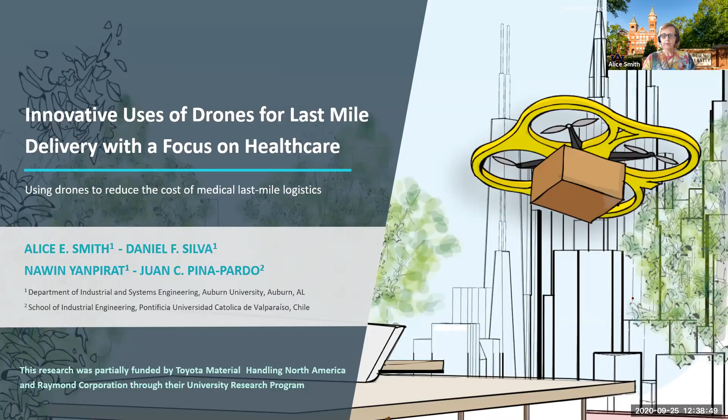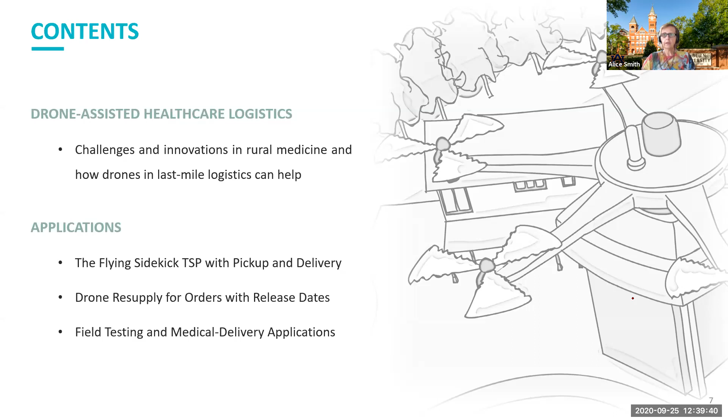Okay, so what we're going to talk about today are some of the challenges in rural medicine and how drones can be applied to help those challenges. I'm going to talk about two different models that we've developed. One is called the flying sidekick problem with pickup and delivery. The other is drone resupply. So those are the two main topics. The first one is by the student Nawin, that's his PhD work. The second is by the student Juan Carlos, who is actually a student at Católica in Valparaíso, Chile, and that is his PhD dissertation. I'm also going to show you some field trials, both virtual and physical, that are part of the project.

So we started this work about 18 months ago, and we're interested in looking at how drones could be used in last mile deliveries, but we were especially interested in addressing some of the problems in our region. Alabama is a relatively rural state that's kind of economically challenged in many areas, and rural medicine is definitely underserved in Alabama and many, many other places in the US and in other countries. And so we felt like drones could have a role to improve this situation. And our idea is delivery of medicines and supplies to the homes of patients and pickups of empties and medical test specimens. This work was already underway for a year or so when the pandemic hit us.

And then we realized that with the pandemic, there's even more motivation for this work because with the need to do home testing, testing for the virus and reporting it and samples and so on, this could be a way, in any type of pandemic, our current one or future ones, I'm sure there'll be some sometime in the future, to deliver tests and pick up specimens or empties as needed.

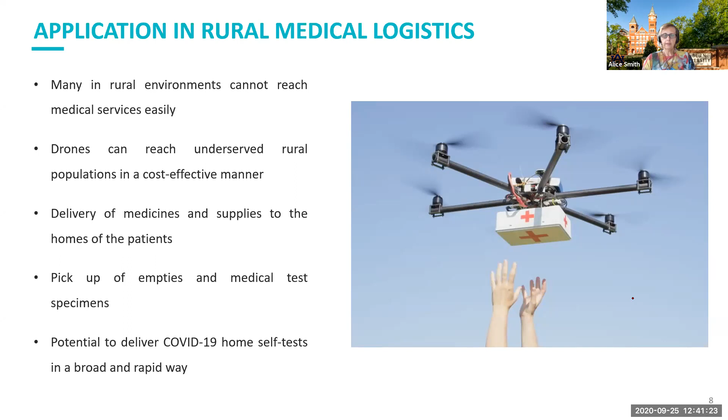So the first thing I'm going to talk about is using drones for both pickup and delivery at customer locations. So one of the things that we were well aware of is that delivery gets pretty much all the attention in the drone literature, but there's also pickups. There's pickups for returns. For example, Amazon recently published that 10 to 40% of their items are returned depending on the category of item. Returns are expensive, but customers are very preferential about choosing retailers with liberal and easy return policies. I know when I shop online, which I'm doing a lot of nowadays, I really want things with, quote, free returns and something where I can just put a label on it and send it back easily.

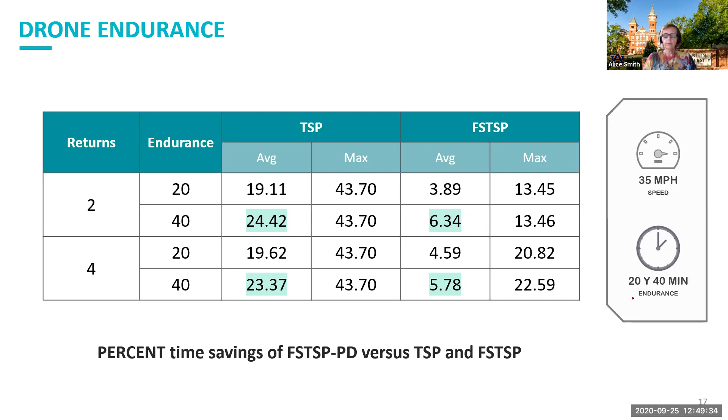If we look at the endurances and numbers of returns, we can see, not surprisingly, if the drone has a longer endurance, in this case of 40 minutes as opposed to 20, we get even improved savings over the more limited drone. The drone speed is also somewhat impactful. So if we move to a quicker drone, again, it improves the time savings over both models.

However, 10 customers is not so many, and our exact approach was not computationally feasible for much bigger than 10 customers. So we developed a heuristic. It's basically an improvement heuristic where we're dividing up, first doing a truck path, and then we create drone paths, and we iterate. We have an overall optimality gap of less than 2% for this heuristic, and it's nearly 2 orders of magnitude faster than the exact model, and it's quite robust to both problem instance and random number seed.

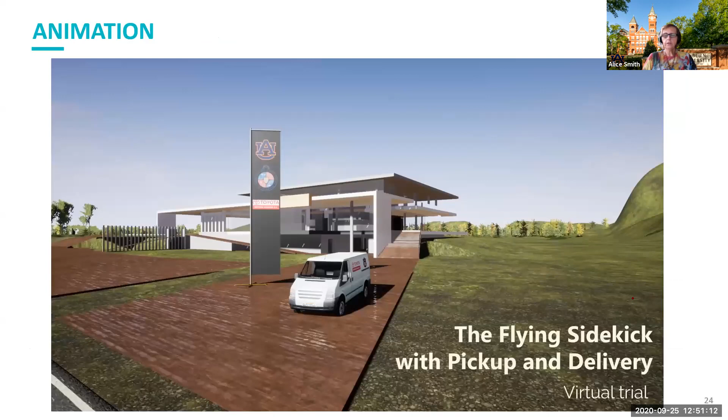So what I'm going to show you now is a virtual field trial of this, because I think it will give you a better idea of how it works. So this is our animation that shows you how this would work in person.

Ugh. Okay, and this worked yesterday when I did this. Let's see. Let me try one thing. Okay. Now, this is not going to work for some reason. All right, let me get out of the slideshow and show it to you this way.

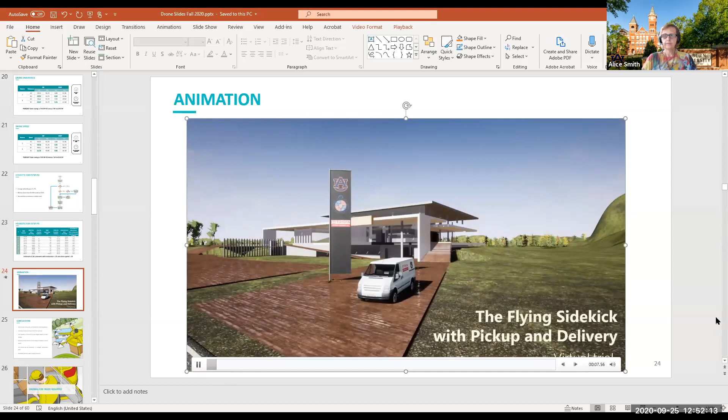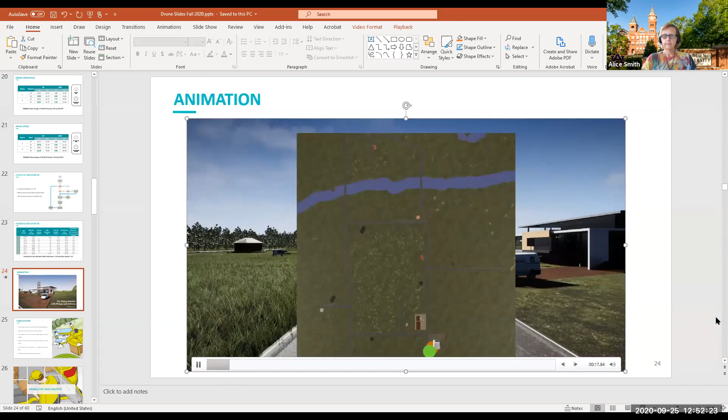Sorry for that. This video shows a virtual trial of an instance of the flying sidekick with pickup and delivery model. In the model, a drone and a truck are used for pickup and delivery of parcels. In this instance, there are 10 different locations. This is how they are distributed in the virtual environment. The location of the vehicles will be indicated by 2 dots. The green dot is the truck and the orange dot is the drone.

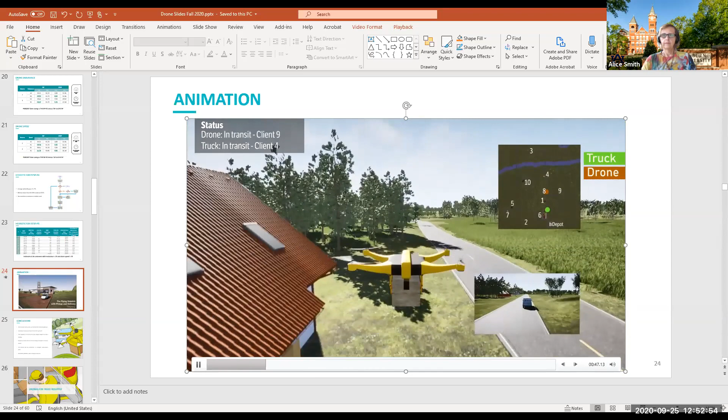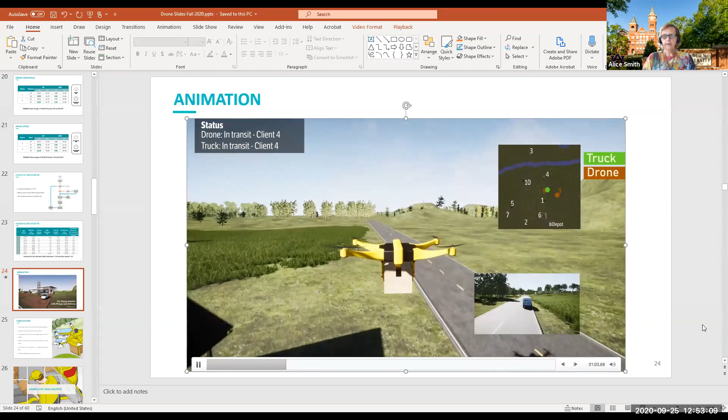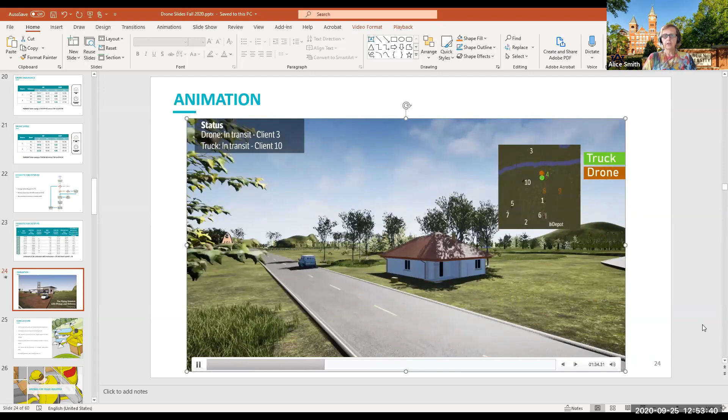So that was a pickup, obviously. So here the truck and the drone are rendezvousing at a customer location. And the drone has delivered and has also been launched to do its next pickup or delivery. And then the truck made the delivery at that last house.

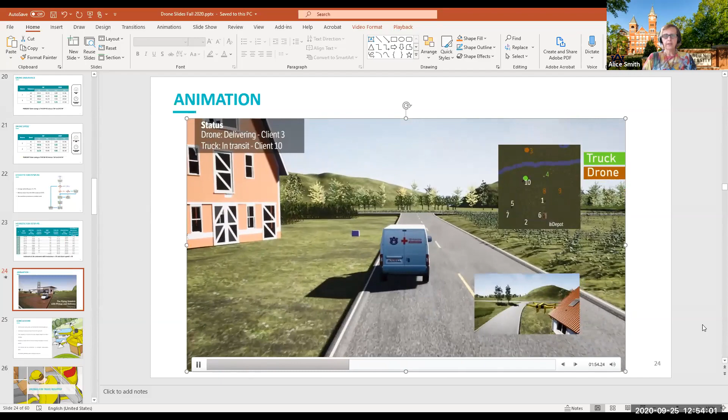We still have to fine tune the animation to be able to show a driver and so on. But so here's a pickup here that the truck's gonna make.

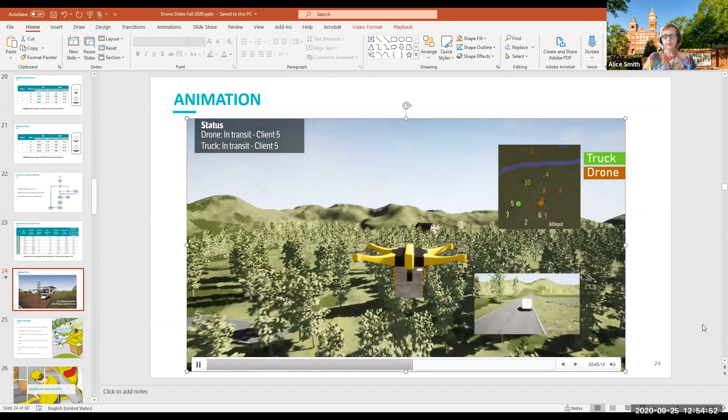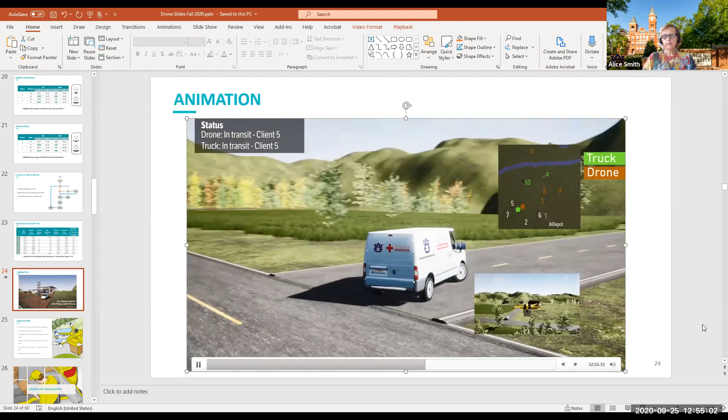There's another pickup the drone is making. And it will now go to rendezvous with the truck. You can watch in the upper right square to see the aerial view of where each vehicle is located. So they're going to meet here at this kind of red barn. So the truck's waiting for the drone. The drone arrives and is launched again.

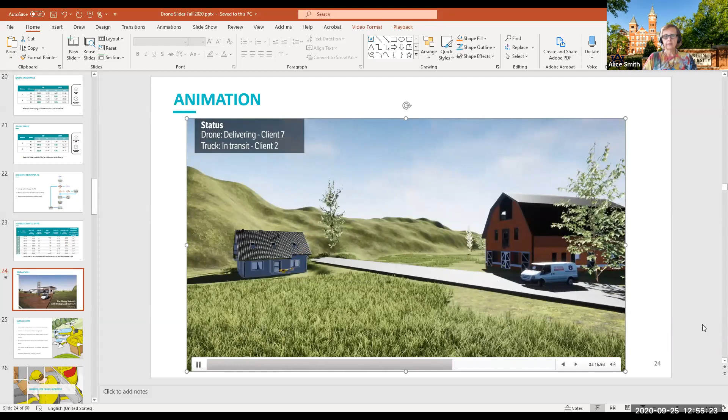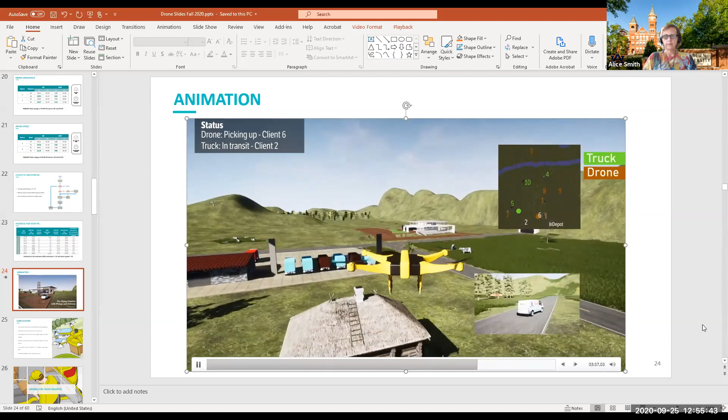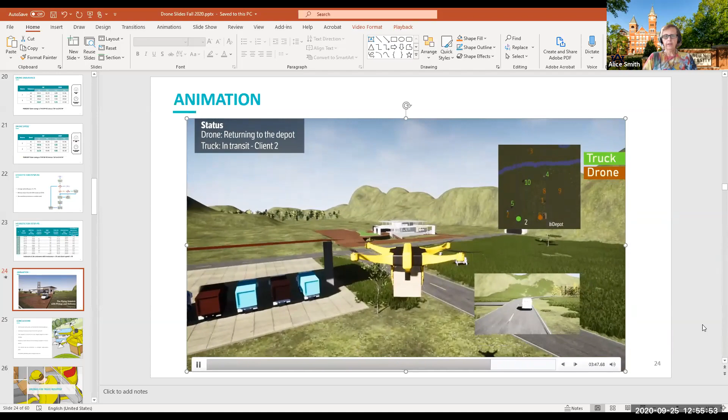And delivering to that particular house. And a pickup here at the log cabin. And we're heading back to the depot. The drone's returning to the depot. The truck's gonna do one more stop and then meet the drone back at the depot. So the truck's delivered a package here and now is returning.

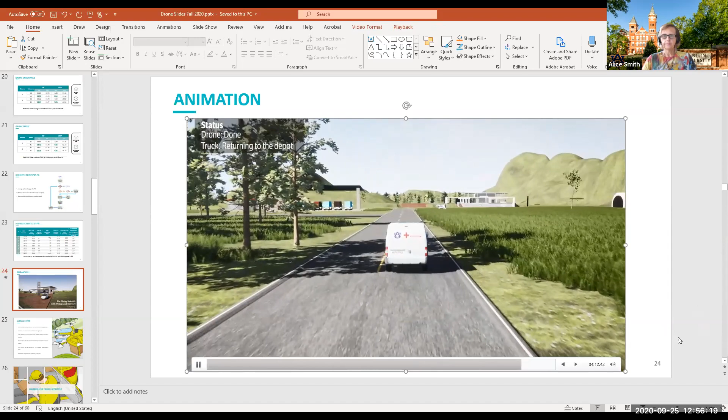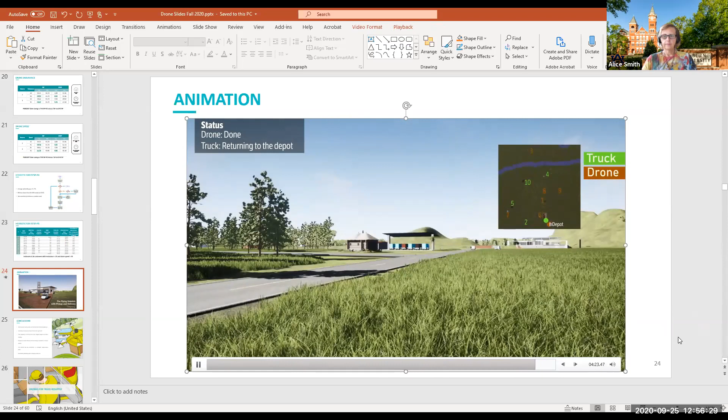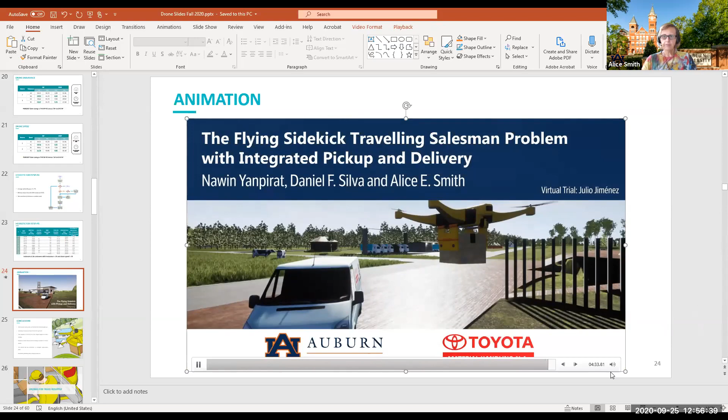And then there's a happy reunion between truck and drone. Okay, let me go back to the slideshow. I hope that worked for you. I hope you were able to hear the audio as well. These videos seem like they're always a little problematic.

So for this particular version of the drone for medical delivery, this could work really well. Besides using the drone just for delivery, when you add pickup, you get savings of up to about 7%. Obviously, the quantity or proportion of returns has a big impact on that. At the current time, we are extending this to multiple trucks, and actually what we're doing right now are 2 trucks sharing a drone. And then eventually we'll do multiple drone truck pairs. And the heuristic was very, very effective.

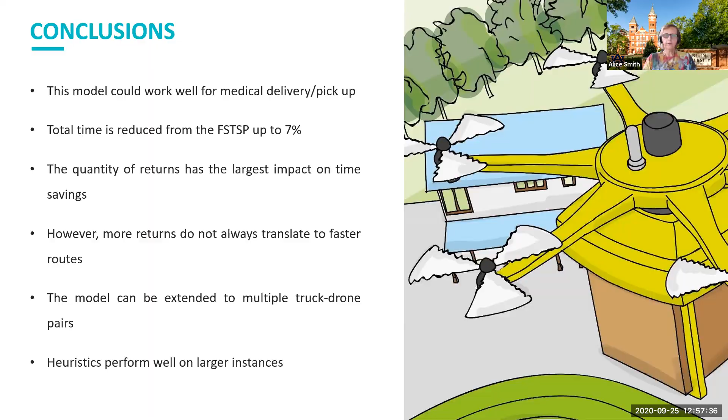Okay, so the second aspect of drones for healthcare use, especially in rural environments, is this. This is also truck and drone, but with a twist. So the drones do not go to the customer locations in this instance. The drones instead go from the depot to the truck while it is out for its rounds and resupply the vehicles.

So in the first model that I gave you, all of the orders had to be ready before the truck and drone could leave the depot. In this case, we're assuming that orders become ready throughout the day. So these might be medicines that are getting filled or supplies that are arriving and getting packaged to be sent out.

So rather than holding the truck and drone at the depot waiting for all the orders to be ready, they are dispatched early, and as the orders become available, the drone actually flies between the depot and the truck to bring these newly available orders so the truck can deliver them.

This has the advantage that the customer, or the patient for a medical application, doesn't need to interact with the drone. That's a little problematic, and one of the reasons we'll be doing a physical field trial is to know how easy or how challenging it is for a typical patient or customer to interact in getting and/or returning things with the drone.

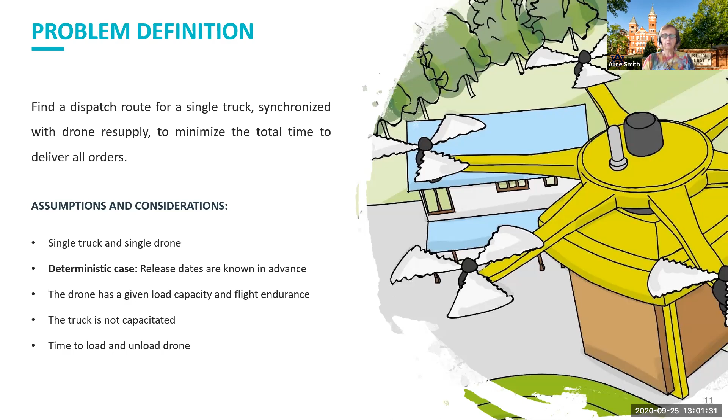The truck, again, is not capacitated. The drone, of course, has a limited load capacity, which in this case is greater than 1 because it needs to carry multiple orders, and of course, a flight endurance. And we also, as before, include time to unload and load the drone. So I'm skipping over the math model. It's pretty extensive. We programmed it in Java and used CPLEX again.

We took instances of 10 to 30 customers from a landmark paper by Solomon. All orders are the same size, and that means that every item being carried by the drone is interchangeable. So there's no decision in this model on should I take one of the bigger items or two of the smaller items. They're all interchangeable in terms of weight and size.

Here, because our student is in Chile where they use the metric system instead of the imperial system, we're in kilometers per hour as opposed to miles per hour. And you can see the drone is going twice as fast and, of course, going Euclidean. We're considering an endurance of 30 minutes by the drone and a capacity of 4 orders, or 4 items, each time it flies.

And the release dates, or release times is actually a better terminology, are uniformly distributed stochastically using beta, which defines that as beta increases, the order availabilities at the depot are more spread out. And then we minimize, of course, the time to deliver all the packages.

We consider a truck speed of 1 distance unit per minute, and the drone speed is set to twice the truck speed. Additionally, we consider a deadline of 90 minutes, which means that the truck should return before that time, or there will be an overtime cost.

The truck leaves the depot with the orders of clients 1 and 2. During its journey, orders 3 and 4 become available. A drone departs from the depot to customer 3, carrying them. The drone arrives at the same time as the truck. After receiving the drone and unloading the new orders, the truck moves forward to customer 4, and then returns to the depot.

In this situation, the extra labor cost paid to the delivery service driver corresponds to 10 minutes of overtime. If the drone is not used, the truck must wait until the last order becomes ready to dispatch. This will generate an overtime cost of 25 minutes. Alternatively, the truck could perform multiple trips, but that would be even more expensive.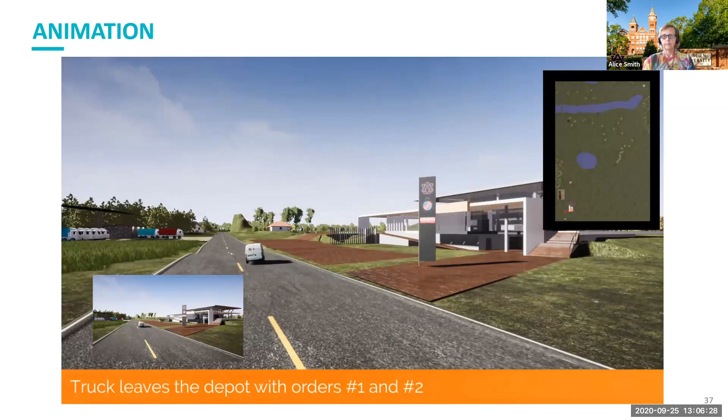At the upper right-hand corner of the screen, you'll have a map showing the location of the truck and the drone. The red circle represents the truck and the yellow circle represents the drone. In the main view, you'll either see the truck or the drone's perspective, and at the bottom left corner, you'll see the perspective of the other vehicle.

So here we have the truck heading out. And of course, it's a Toyota truck.

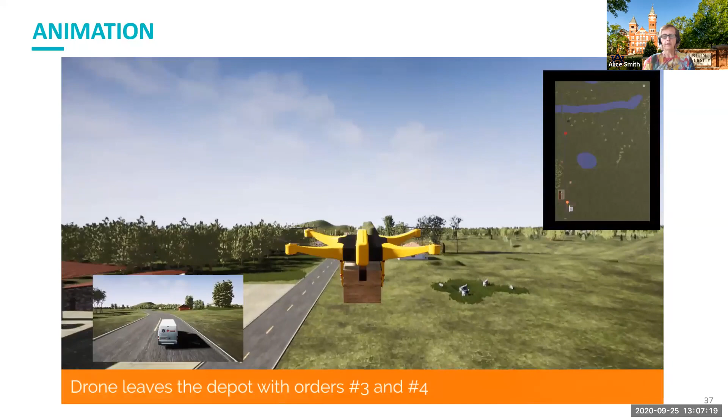And to make deliveries that were available before it left the depot, it's starting on its route. And at some point, the drone will be launched from the depot to rendezvous with the truck to bring it orders that have become available since the truck left the depot. There it goes—it's flying out to meet up with the truck at a customer. The drone is bringing orders 3 and 4 and meeting with the truck at customer 2.

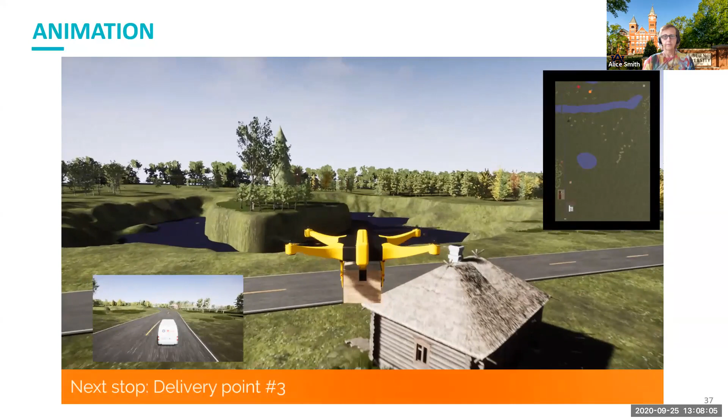So they've rendezvoused here. The drone has waited a little bit for the truck and rendezvoused at the log cabin, and now the driver will collect the 2 additional orders and then launch the drone to go back to the depot. And now the truck will continue on its route to deliver the 2 new orders, which are orders 3 and 4, to those customers.

So here's a delivery of one of the orders that was brought by the drone.

So this model, again, can significantly improve upon the customer service and the overall efficiency of deliveries in the last mile. I think for medical delivery in rural environments, it's a very pragmatic method because the patient does not have to interact with the drone, which is a concern of ours, because many of these patients are elderly or incapacitated and may not be tech savvy.

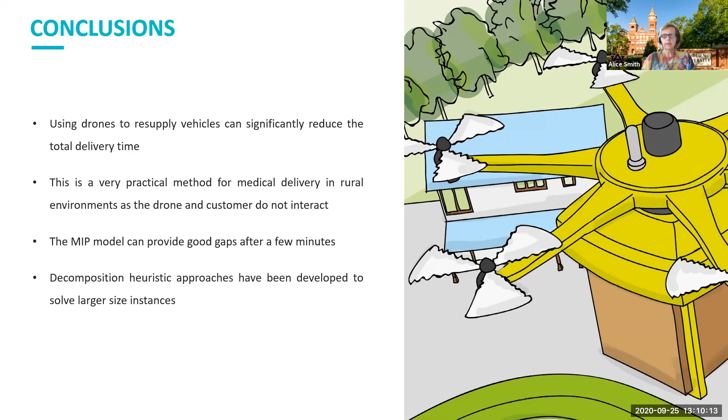Okay, so let me talk a little bit about our field testing. You saw the virtual test. We felt the animation environment was important so that we could see, but also people like you and our sponsors and potential sponsors could see exactly how these things work.

And I have to give a shout out to the student who animated it, Julio Jimenez, who's a student also down in Chile, but he'll be joining Auburn. He's actually now an Auburn student, and he was unable to make it to campus in August, but hopefully will arrive in January if the pandemic is a little better by then.

Okay, so part of our project involves physical field testing. When we wrote this proposal, in all honesty, it was not part of it—we were going to do the math model and maybe some virtual testing. But I think Daniel and I felt it was important to actually get our hands on drones and understand more about the limitations and the challenges and the issues needed from an actual physical implementation. So we have two drones.

We have a smaller drone that was actually in the department. It didn't run, but one of our students, Mehmet Kurt, who's our drone master, was able to refurbish it and get it flying. And then with the money from the project, we purchased this Tarot drone. Most drones, as I've said earlier, are actually designed for surveillance or taking pictures. So they tend to be smaller drones equipped with cameras, but we needed something heavier that could carry payloads. And this Tarot drone is made for that, or more made for that, and it can carry payloads of over

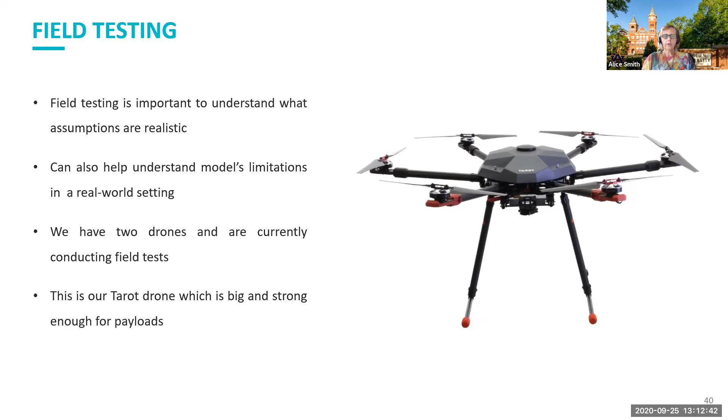2 kilograms total. It runs using a mission planner software, and so the route of the drone, including pickups, deliveries, stops, and so on, is pre-programmed in the software, and it's sent out on the drone. So I'm going to show you a show.

We haven't done a full field trial yet. We were supposed to do it this summer, and our project was delayed because of the pandemic. The drone was delayed, and just with lockdown, it was too difficult. So we are working towards doing this in October and November. It will not involve real patients, but it will involve the real environments, and it will involve a real truck/van tandem with the drone.

And this is our Tarot drone. This is not an animation, this is a film. Now you can see it's got a big payload on it that it's carrying, and we're demonstrating here how autonomously, with its program in the mission planner, it can be programmed to take off and deliver at various locations and either pick up or deliver packages.

In this case, you can see the payload window open here, which would indicate it could drop a payload or a payload could be picked up. Then it takes off again. So we needed to get the Tarot drone customized. The company customized it for us so that it would be suitable for payload use.

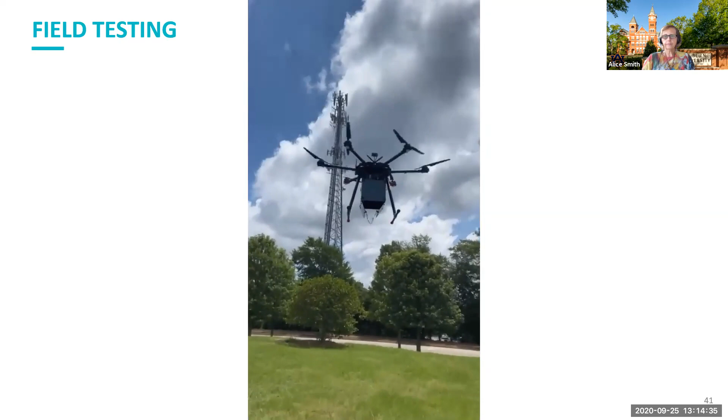Okay. So this concludes the formal presentation. If you're interested in our work, because we are doing more, we've got some ongoing work that I haven't been able to talk about, but hopefully will in the future.